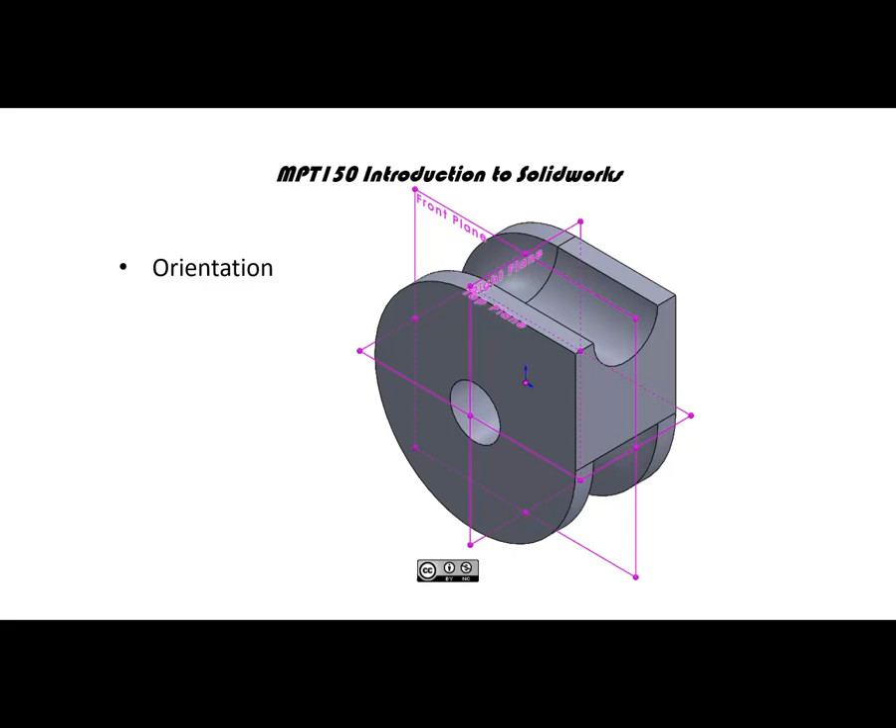All right, problem 6.5 MMGS.

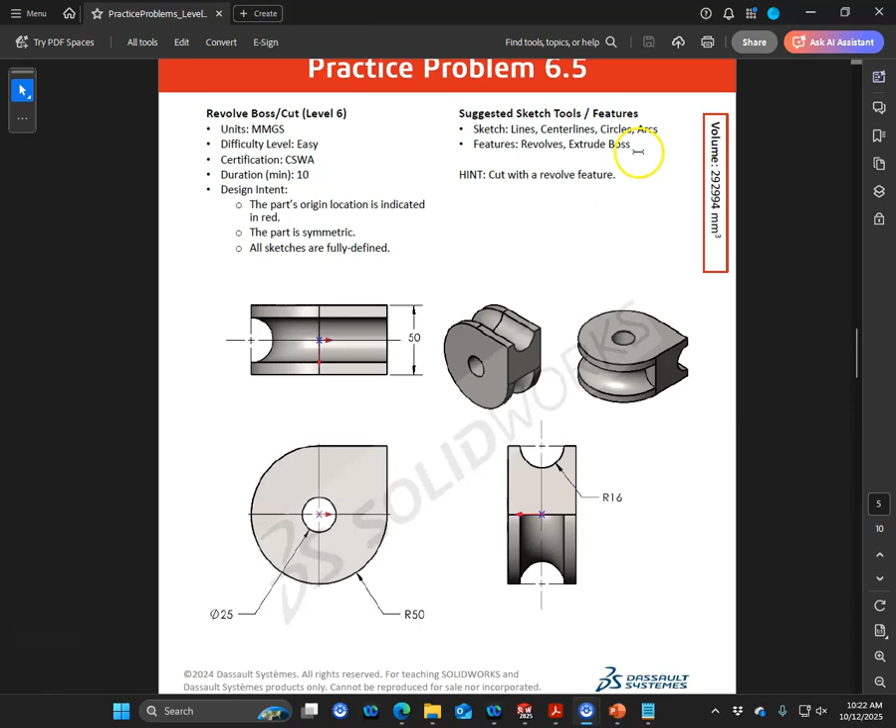Part origin is located at the center, middle, lines, center line, circles, arcs, revolve, extrude boss, cut with a revolve feature. Don't really see any crazy geometry, but we have two kind of isometric views.

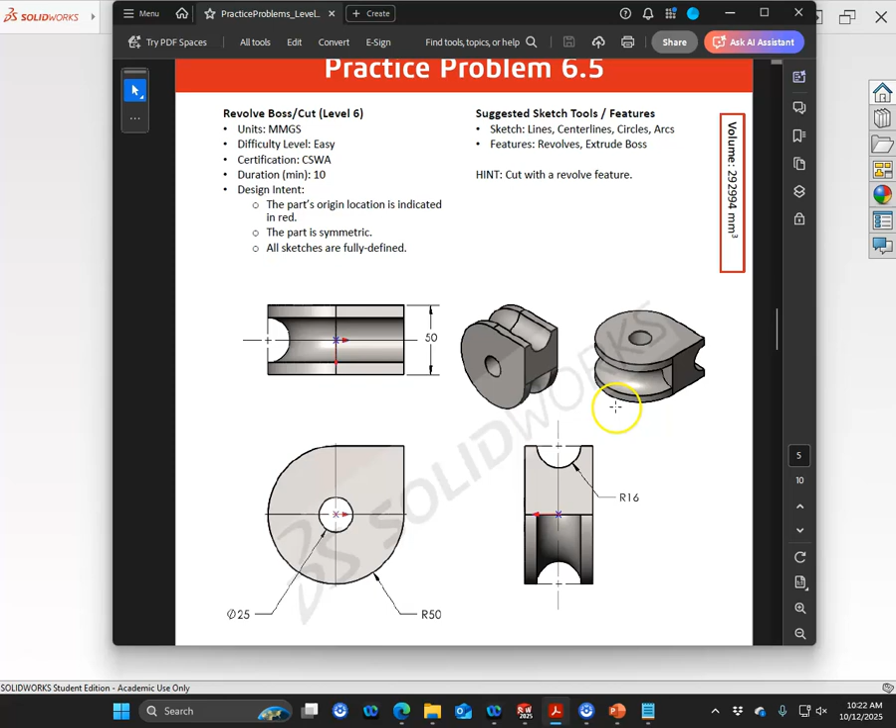If we're to take this as the front, right, and top planes, then we're going to draw on the front. So I'd say that in this case it's optional which way you want to go. This is an assigned part though, since we're going that route.

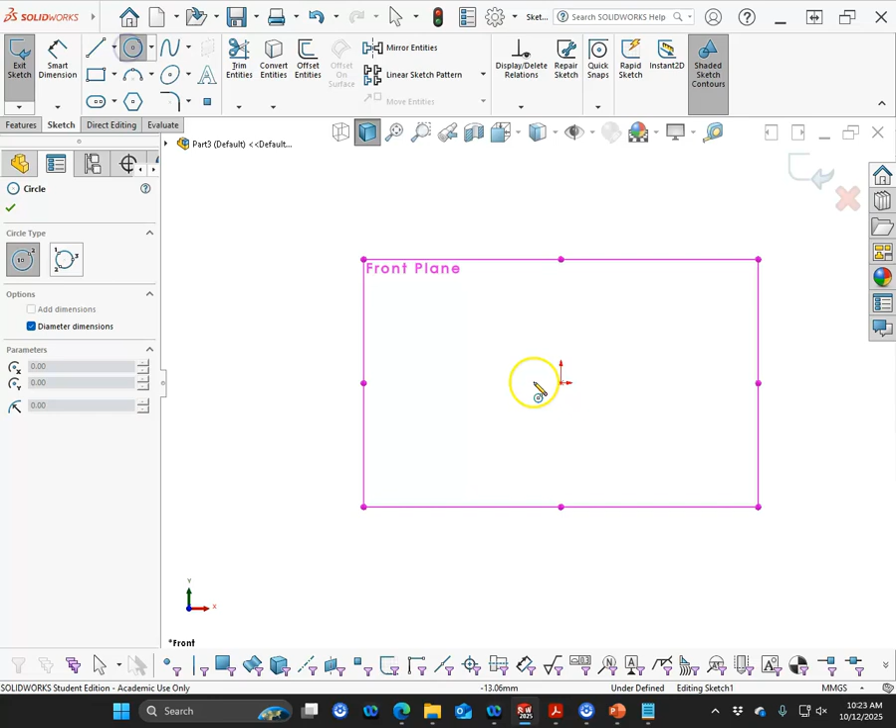Let's go ahead and open up the sketch. We'll bring the first one in, and that is a diameter of 25. And we have a radius of 50, so 100.

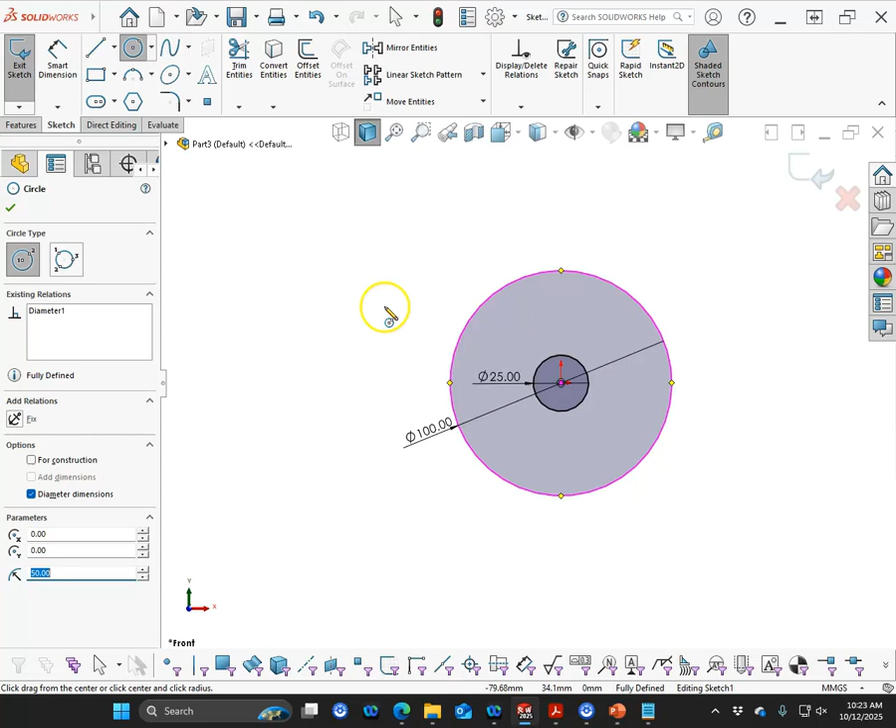All right, so make sure that I'm getting those. I'll jump out of that, highlight, and we'll switch that over to radius so I don't get myself confused on the numbers. All right, when we go ahead and extrude this, this is going to be a midplane.

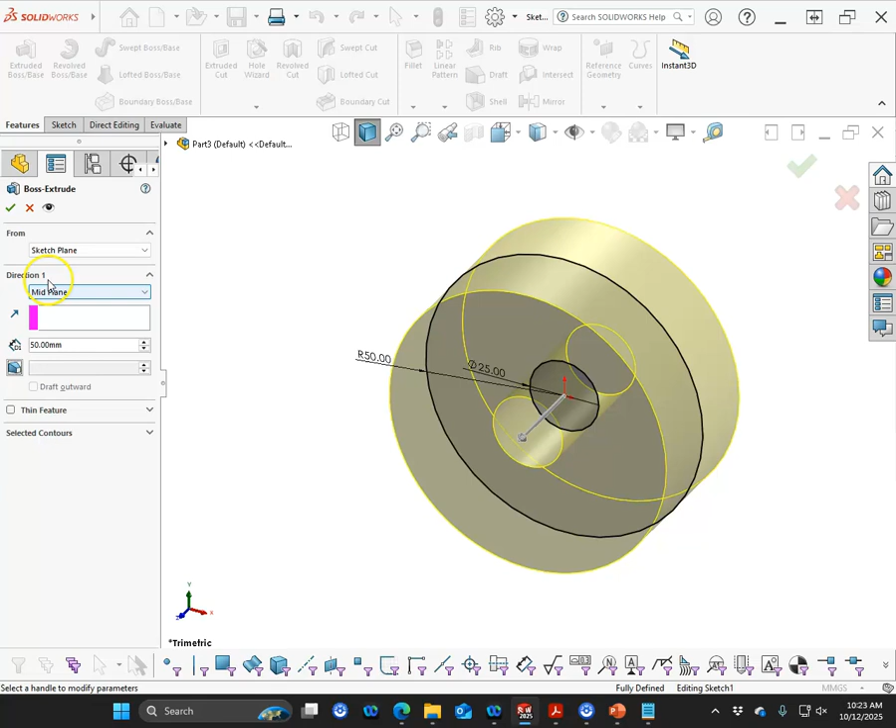So it stays at the center, and we have a distance of 50 millimeters. So tab to update the preview. And then, let's see, oh, I guess I could have.

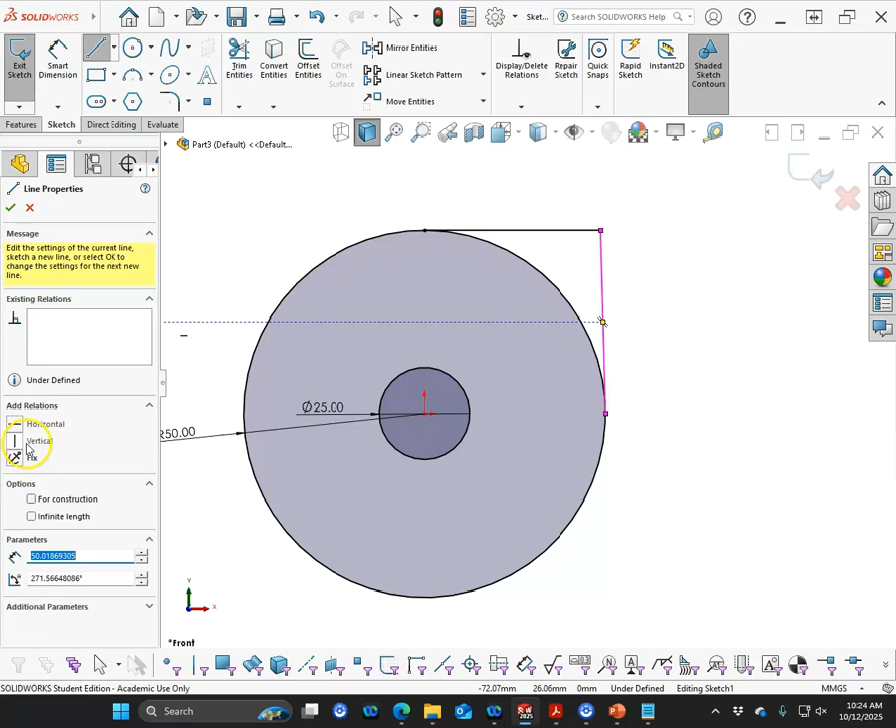If I go back in and edit the sketch, we can just go from the quadrant out some distance to the quadrant, make sure that it is vertical. And that's probably going to bark at me for the additional region that I created.

And it's telling me it has open and closed. And then we'll just cancel all of those to get out of it. And go ahead and accept it again, exit sketch and rebuild.

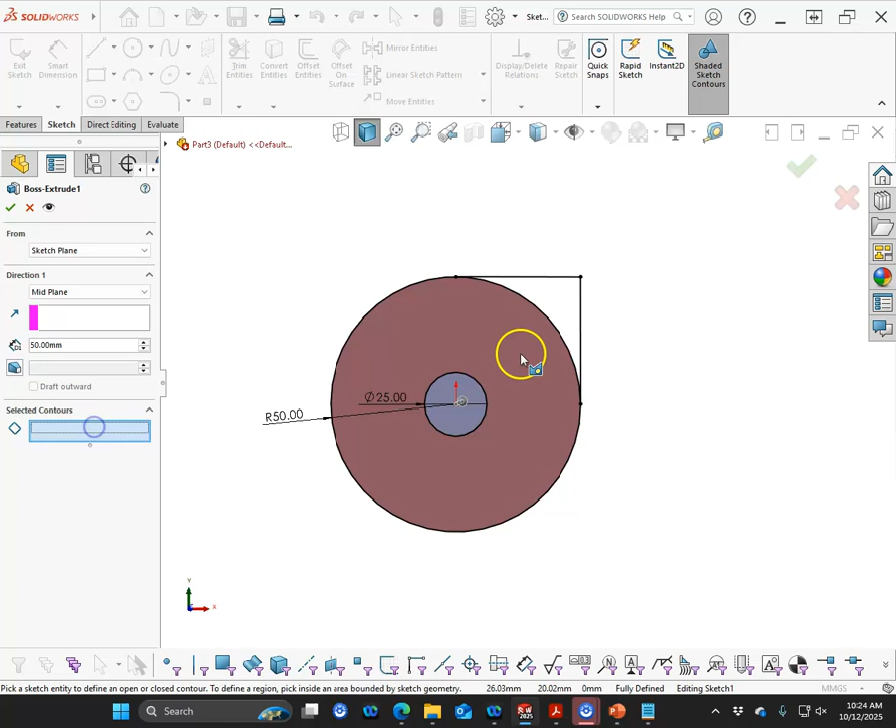And we'll go back into the boss extrude and select both of the regions. All right, so same result. I could have just added it on by itself, but it does get it there.

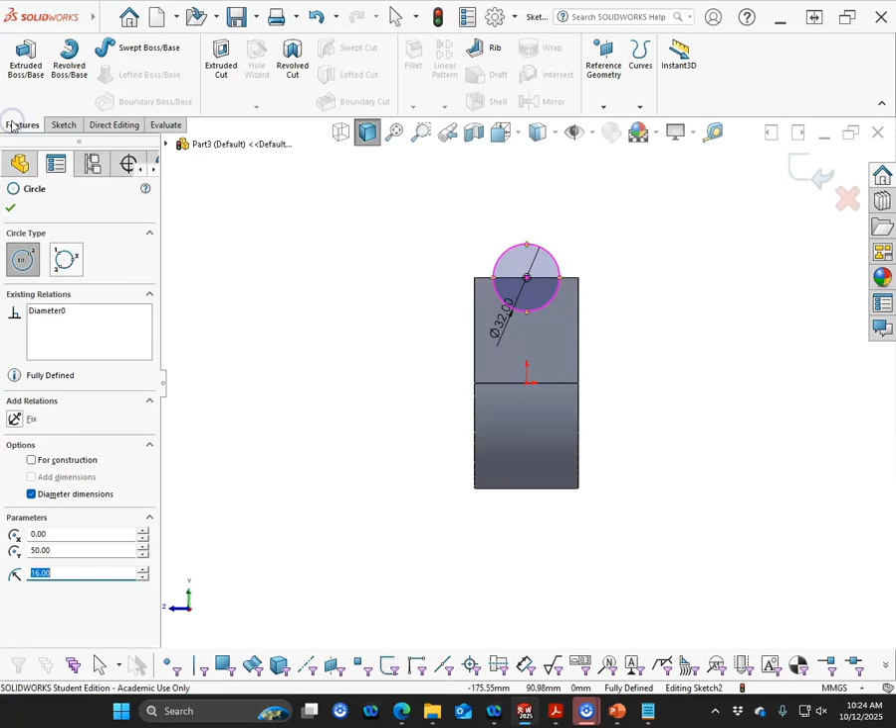All right, so radius of 16 is going to produce 32. And we'll just go ahead and extrude cut to a blind condition of 50, or since I do want to tie this to existing geometry and it does give me a vertex right there.

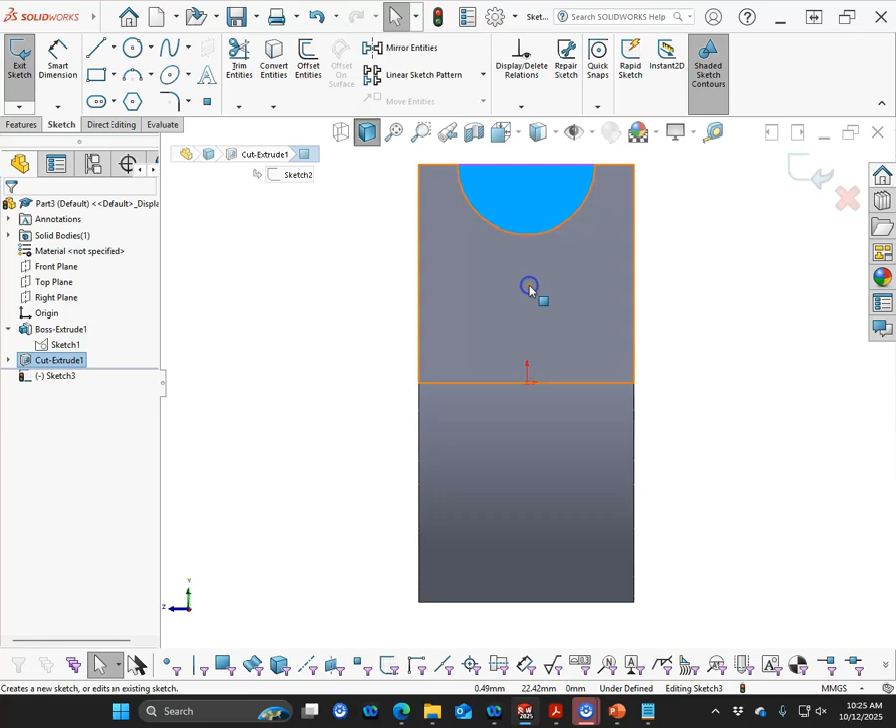Let's use the vertex, because then I'll be able to go into my sketch and we'll just do a regular center line through the origin and come back to that face, convert all of those entities, and we're ready to do the revolved cut.

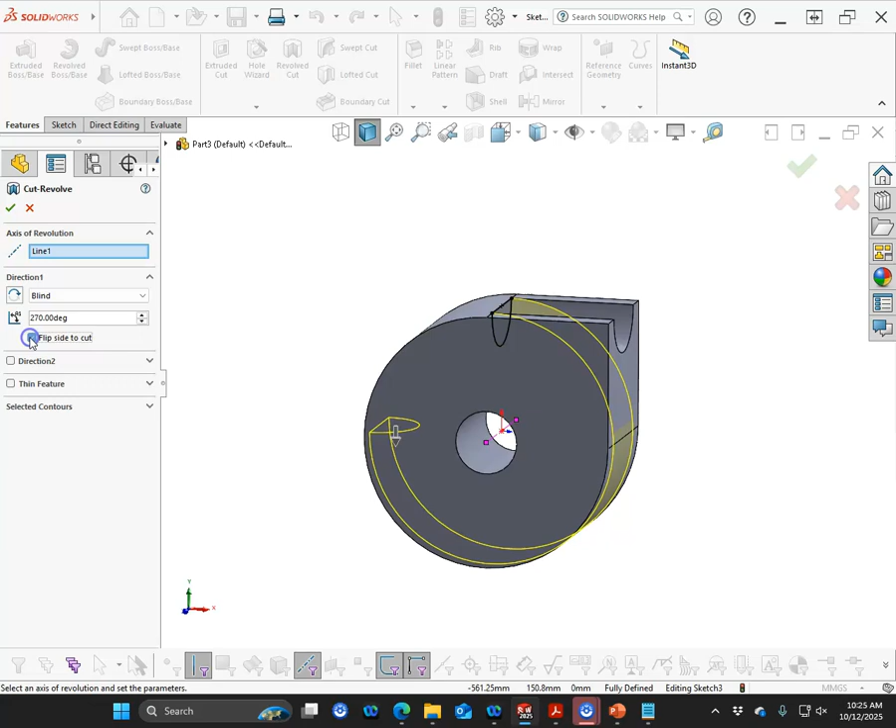For a distance of 270. And flip side. Nope, not flip side, let's go reverse.

All right, one of those combinations is going to give me what I was looking for. And it shows it terminating there, so I don't have to do anything else to blend that out. So that looks like that gets it.

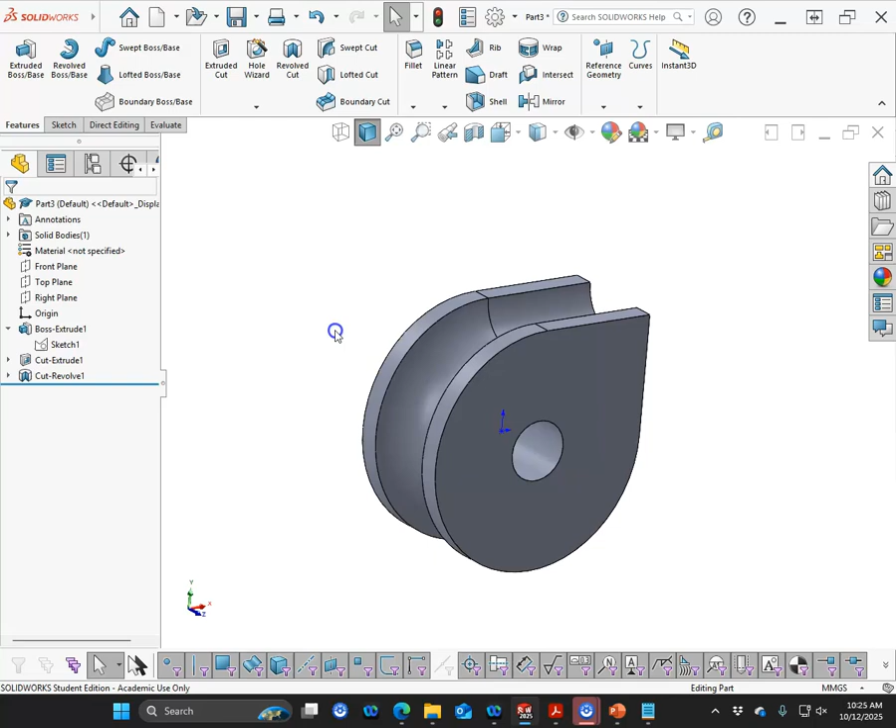So let's go isometric, make sure to save this. We're doing P6-5.

And we're going to go to a volume of 292,994. Evaluate, this property is 292,994. All right, so we got that one.